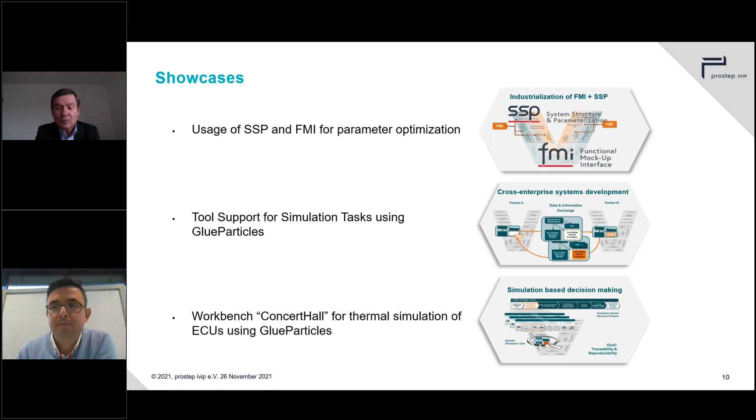Welcome to our webinar. I will introduce you how we can use SSP and FMI standards for parameter optimization as first showcase. My name is Hasan Essen from Denso Automotive, Germany. After giving a short background, I want to also briefly introduce you the SSP standard. I believe maybe for some of you it is not known. And afterwards, I will directly start with the short demonstration using FMI and SSP standards in which we developed a transmission control unit. Then I will conclude my talk.

As a background, Stefan already introduced that when we are dealing with complex system design, this requires often collaboration between engineering teams, which in return means also exchanging simulation models between these teams. These teams can come from the same company, or it can be also between companies. So in our proof of concept that we developed, we wanted to see how SSP and FMI standards can facilitate, can support this kind of collaborative development environments.

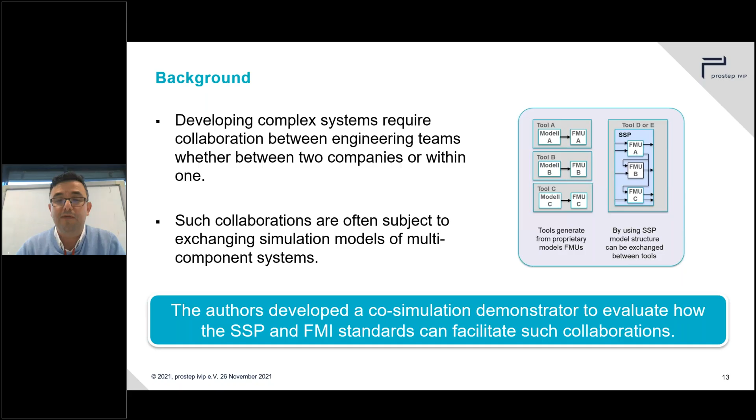Let me briefly introduce you the SSP standard. First of all, SSP stands for System Structure and Parameterization. This is developed by Modelica as a Modelica Association project. The purpose is to provide a tool-independent standard to define a complete system consisting of one or more functional mockup units, and also includes their parameterization.

As a structure, SSP is actually a simple zip file, but the zip file contains several other information. It, on one hand, contains complete system information with all related resources like FMUs and so on. But on the other hand, it consists of several sub-formats in XML. And from these formats, the system structure and description, the first one you see here, is the only mandatory one that you should have in an SSP. This basically defines a hierarchical and functional structure of this network of FMUs.

In addition to this, you can, of course, have also different XML files defining system parameters, or if FMUs have a different naming for same parameters, you may need a kind of parameter mapping, or if you want to collect control signals in a central location, you can also use the signal dictionary. But as mentioned, these last three are optional files.

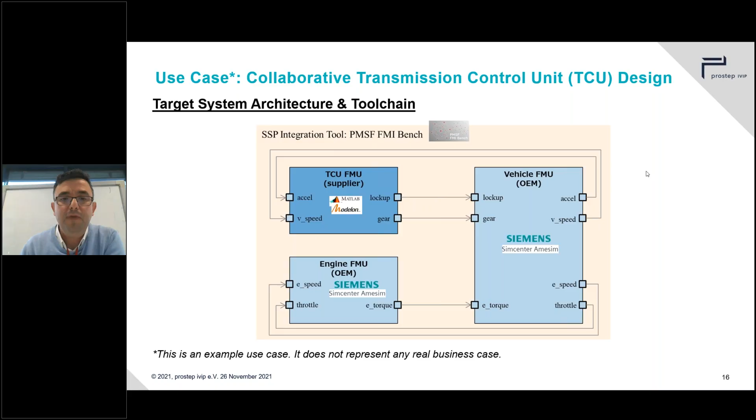So after using these authoring tools and creating the FMU models, we needed an integrator to create this SSP system, and for that we used the PMSF FMI Bench tool to create this integrated SSP system. Okay, now I will start one by one what we have been doing here. So this is, as you see, the tool interface. This is the PMSF FMI Bench, what we used for integration.

So the first thing we need to do is that using this tool, we can create an SSP project. And once an SSP project is created, we can import the already delivered FMUs from OEM first into this architecture. There's this import function, so we are here importing these ones, and through import you may also give, for example, any name you want to give or which signals you want to give. You can make this kind of selections.

After we imported the OEM FMUs, we also go to the model that we developed. Similarly, it's also imported. Yes, so basically as a first step we are done. So in this case, we basically created now the SSP project. As you see in this figure, we imported 3 FMUs. But as you see, in the status now these FMUs are not connected with each other yet. That's what we will do in the next step.

So now we want to integrate these ones. As you know, in tools like MATLAB and Simulink, you can just connect the input and output ports of the different blocks. What we do is very, very similar. Here as connectors for each FMU, different input and output ports are listed. And as shown in the first architecture picture, we have this specification, we know which input signals should go to which output, and with drag and drop these signals can be mapped with each other.

So this simple step basically allows us to connect the components together, and that's the picture we then reach. So basically now we connected and everything is now kind of ready. Actually, in this case, we can already simulate this system. We have our integrated system ready.

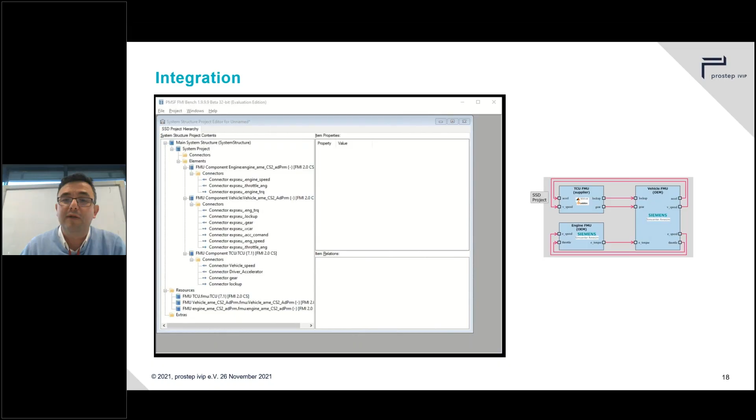However, we wouldn't be able to observe any signals, or we wouldn't be able to vary any parameters right now, because we didn't describe how we will interface those with the outside of the SSP architecture. So that's what is necessary. Once you packed and connected together, you need to define the link to the outside world from the SSP system. That's what we do: we will now expose these connectors.

And all this is actually rather straightforward. You will find a command to expose the connectors, and this will give you the opportunity to export all output signal lines. And one thing is that later on, we want to reach these exported signals, visualize them using any script, or maybe modify them. If you want to do something like that, it would be a good idea not to use directly the names as defined in the FMUs; you can of course rename them and make it simpler. You can make your life simpler for later on reaching these signals.

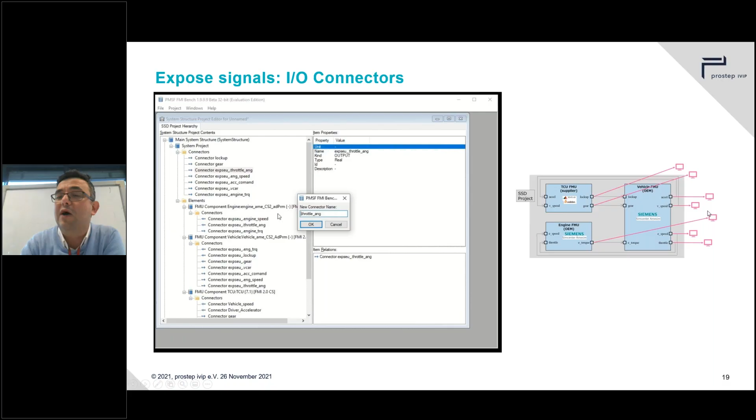Okay, when this is done, basically that's what we will reach. As you see in this picture, now it was connected, and also all of the output signals are now linked to the outside of the SSD. So we can now observe those.

Okay, so the next one: now we have the signals to observe. However, we still cannot edit the parameters. There will be, of course, many parameters in the FMUs, and you want to vary them. For example, in our case, we want to vary some parameters from engine and vehicle, and then we want to see if our TCU, or transmission control unit, is robust to these changes. This you do in a similar way.

First, from each FMU, in addition to the input-output connectors, you also make the parameters within this FMU exposed to your SSD architecture.

So this you do for all of your FMU components. Whatever parameters you have, you can expose them. And once you did this, you will do the next step, like with the signals, also from this SSD architecture to the outside world. Also, you can make them visible. You can choose which one you want to be visible, and then you need to export them, expose them.

When we do this, we will see here now in this list not only the input-output signals, but many other parameters are listed. That means that they're exposed also for the outside world. Once we completed this, there is one last step before we can simulate. We want to create a standalone simulator.

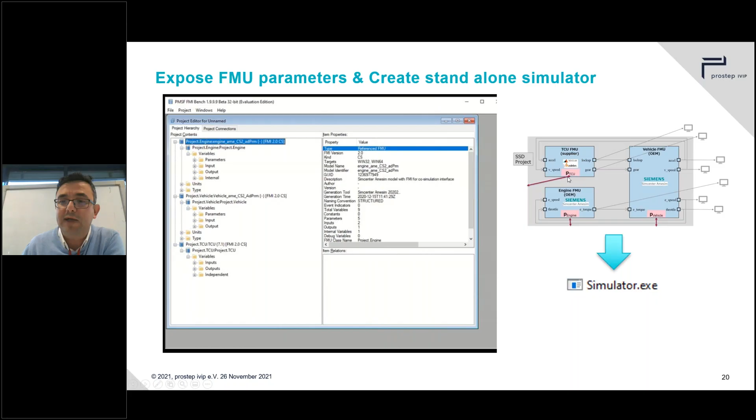That's what we now have. So not only the signals, we also have now access to the parameters from the vehicle and engine and TCU FMUs, and we exported it as a standalone file. Now this simulator file is tool independent, we can move it to any computer and we can run it basically directly. That's what we did. That's shown in this next figure.

So you can run it basically from a command line. You go to your folder where your simulator is, then, as you execute any other executable file, you run it. It offers you some parameters to add and change, so that you can run the simulation with different functionalities from the command line. -H, for example, is help. And you can also edit, for example, start time, stop time of the simulation, or some kind of high-level, system-level things directly from the command line.

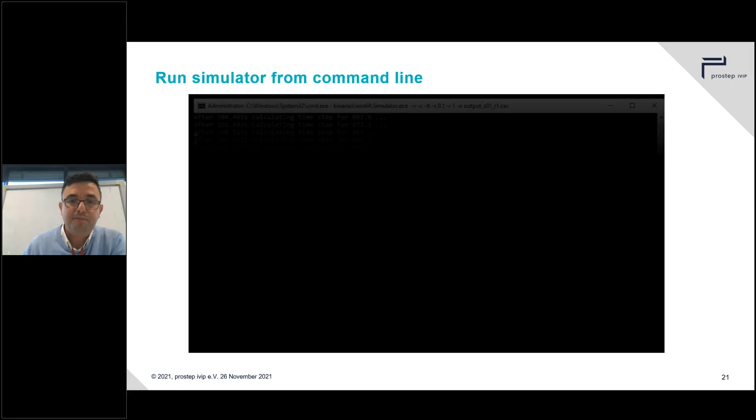Then, for example, with these kind of commands, you can give an output file destination, so a CSV file name. So when you run the simulation giving these destinations, the simulation starts, and at the end, all the output will be stored in this file where you can go and see what happens. Okay, so this was 1180 seconds, I guess, simulation. So it runs, finishes and saves the data. Of course, this is good, so you can repeat it one by one and create such files.

However, what we wanted to do is different. We wanted to run the simulation loops and make the parameter variations automatically. For that, we created a loop using a Python script, and we used Jupyter Notebook for this. So we could define, for example, the engine size between 1.5 and 2.1 liter, we can vary the engine size between these two levels, and also vehicle mass. We can run the simulation in loop without any manual interruption.

And then later on, we could see the results and check if our control unit for transmission does the things it should do. Here, one very simple example, I can show the results. If you keep the engine size constant and increase the vehicle weight, we see that since the engine size is not enough, we need more downshift in the car, which we would expect. And the other way around, if the vehicle mass is constant but the engine size is growing, we almost don't need the downshift at all. So it does what we expect. Like that, we can make the variations and check if our transmission control unit works properly.

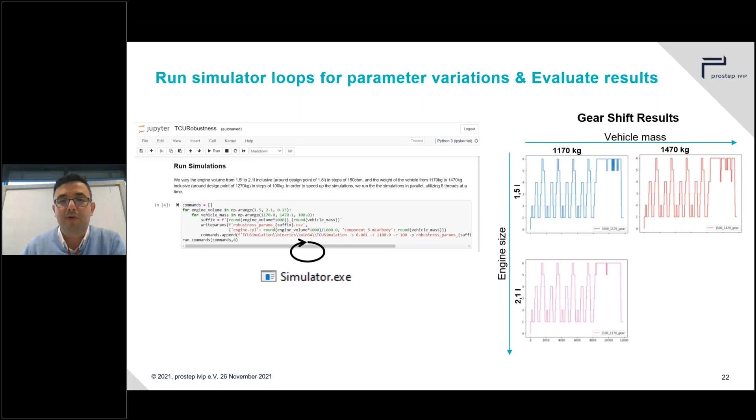Okay, so before I conclude my talk, I want to also underline one point. One of the aims of using the standards is to be tool independent. So we wanted to check if this SSP architecture can be visualized or run using another tool, to check interoperability, and for that we checked this with the Easy SSP tool from Exxcellent Solutions, and that was possible. So once you create the SSP architecture using one tool, you can use any other tools that are compatible with the SSP standard. You can import it there and work with another tool.

Okay, so then let me conclude my talk. So we created the SSP architecture with 3 FMUs with many parameters to vary. What we could see is that its parameter handling features work quite well, and it allows us the flexibility to expose these parameters. It also has the possibility to hide parameters if you don't want them to be visible, so IP-sensitive information can be hidden.

And so I believe that these standards will play a core and important role in dealing with collaborative complex system development tasks. We will keep on working on this, for example from a simulation data management point of view, or how we can create this SSP architecture automatically. Traceability is another issue, so we will continue working on this. But related to traceability, showcase 2 will show you some good results. So with that, I would like to hand it over to Pierre to introduce showcase 2.

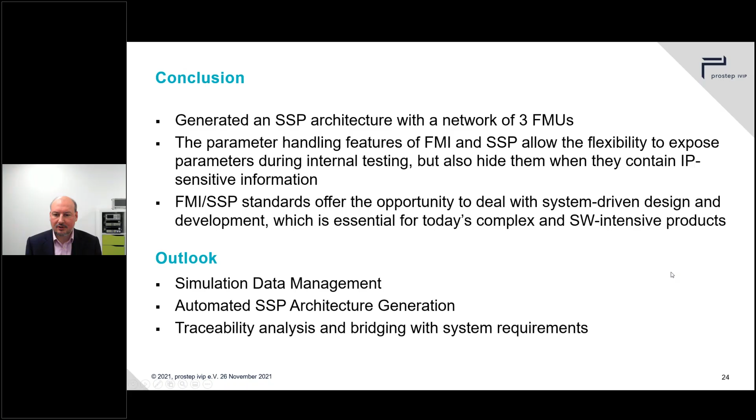Thank you very much, Hassan, and thank you for presenting these results that also employed our tool FMI Bench. I'm Pierre Mai from PMSF IT Consulting, and I have the pleasure of introducing the second showcase. As Hassan already demonstrated, SSP in combination with FMI already allows you to easily complete simulation tasks across tools, decoupling the modeling tool from the system architecture tool and from the simulation building, and allows you to achieve portability in this fashion.

The next showcase will demonstrate this in a slightly larger context, so not only at the level of being able to exchange models, but being able to do so in a credible fashion, in an ordered process, and what SSP and extensions above SSP can do to help you achieve that.

So if we look at the current status of simulation usage, I think we can all agree that we do quite a lot of simulation nowadays. We have great tools and not so great tools, but we know that great tools are available. We have great modeling languages, and standards like FMI that allow us to exchange things without sticking to one modeling language. And we have a lot of experience in the various domains with established simulation use. So in that sense, everything looks hunky-dory. We trust our simulations. We understand the benefits and drawbacks of certain modeling approaches. So that's actually quite good.

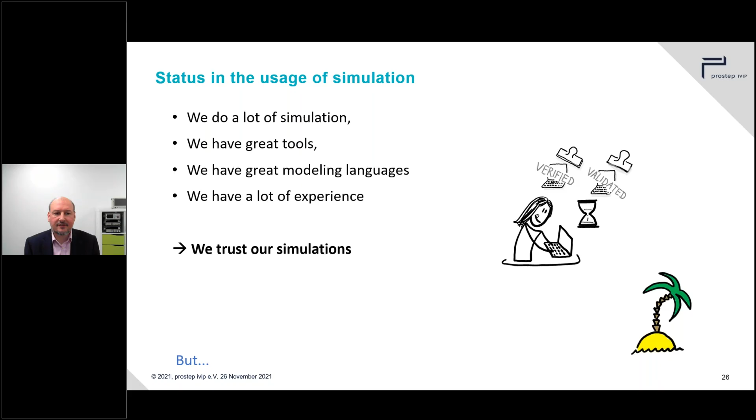However, increasingly, looking at the future, we are faced with the question of how we convince others to trust our simulations. Because decisions are increasingly based on the results of simulations, and decisions have far-reaching consequences. We are now talking about, for example, validating products mostly using simulation in some instances, or at least partially doing this in simulation and not only in real-world testing.

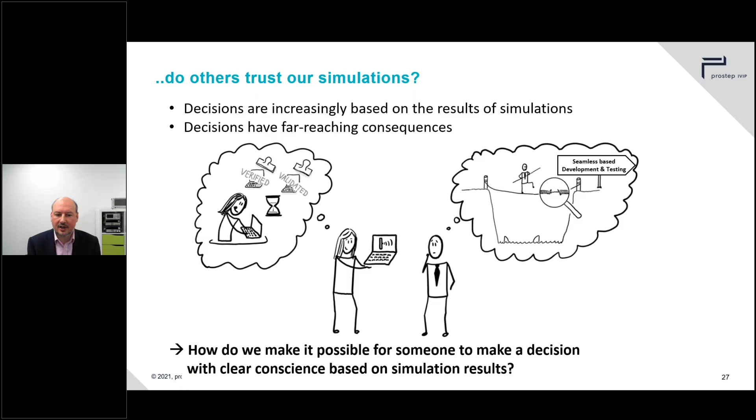And for that to work, not only do we have to be convinced that what we are simulating is proper and right, but we also need a way of demonstrating to outside instances and the public at large that what we are doing is something we can stand behind. So the question becomes, how do I transport this belief in the validity of my simulation to the outside world? The key question is, how do I convince others about the credibility of my simulation results? It's not only whether I believe in them or whether they are correct, but whether others can also believe they are correct. Are they credible in their eyes?

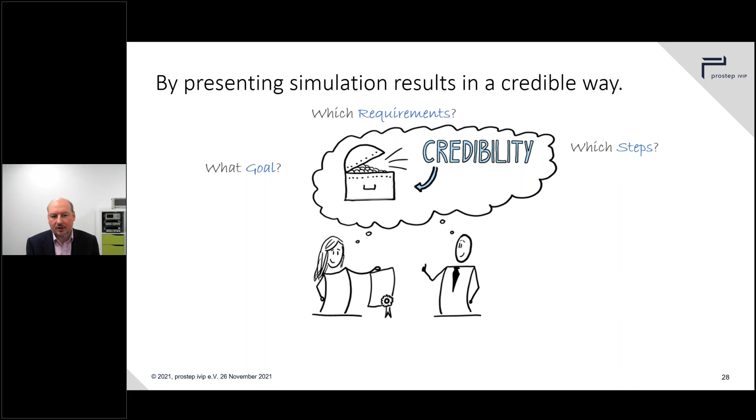In order to do this, we have to answer quite a number of questions. For example, what was the goal of the simulation? What were the requirements? Which steps were performed? What models? Why these models? How was the output processed? And so on. And these are just a couple of the questions that arise here.

So what the SmartSE project focused on was going beyond the kind of collaboration model that Hassan already demonstrated: what is really necessary to easily and reliably answer these kinds of questions in a transparent fashion? There are two parts that we see in connection with this. The first part is that we need a common understanding of the overall simulation process. So something like a credible simulation process that divides simulation tasks into individual phases and steps that can be performed with individual details, of course.

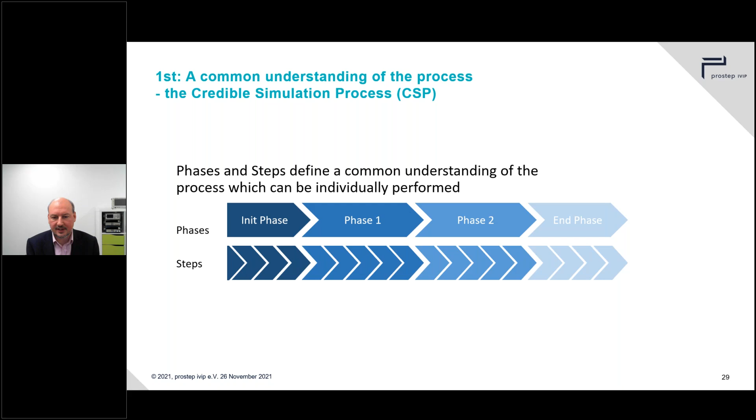I mean, every kind of simulation task will vary in its details, but there is a common framework in which we can really talk about what is happening, what needs to happen, what are the interdependencies between the different phases and so on.

And here inside the SmartSE project, an instance of this, the so-called credible simulation process, was developed and defined, and has actually in parallel also already been validated inside the SET Level project, an ongoing research project that's federally funded in Germany, where many companies are participating in order to come up with a simulation tool chain for the development of autonomous driving systems, for example. And there, this process has been adapted and has been put through its paces in order to see how and whether it fulfills the goals that are behind it.

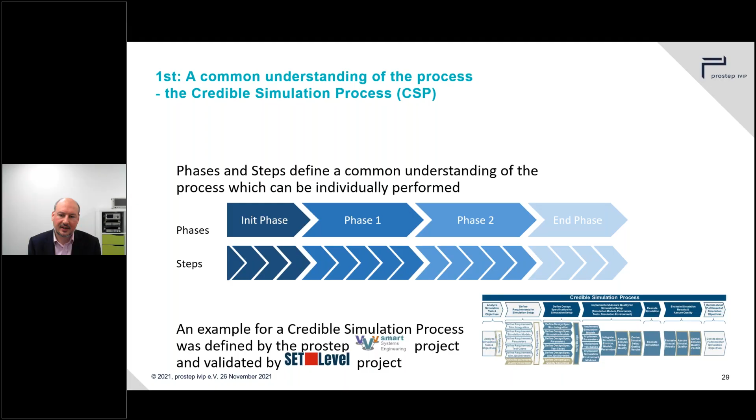And the second step to this is when we are performing such a process, lots of information is being generated along this process chain. And we really need to collect all of that information in a way that allows us to glue it together to provide a comprehensive answer, not just individual information pieces. And that's where the so-called glue particle approach has been defined to try to collect that kind of information in reusable structures and in standardized structures that allow the easy exchange and interchange of those kinds of information chains.

And the one special focus area that we are focused on is how to put something like this on top of SSP, because SSP already helps us in providing containers for exchange of data and various techniques for addressing resources that are needed.

And for traceability purposes, for the glue particle, we kind of need the same kind of capabilities of being able to take all of the disparate parts of information and piece them together, provide metadata, provide their interrelationship, and exchange them between tools that are part of the overall tool chain, because the whole simulation process will never happen just inside one tool or even just inside one partner company. It will span tools and companies, and hence we need an easy exchange of all of the partial information so that we can collect it in a good way.

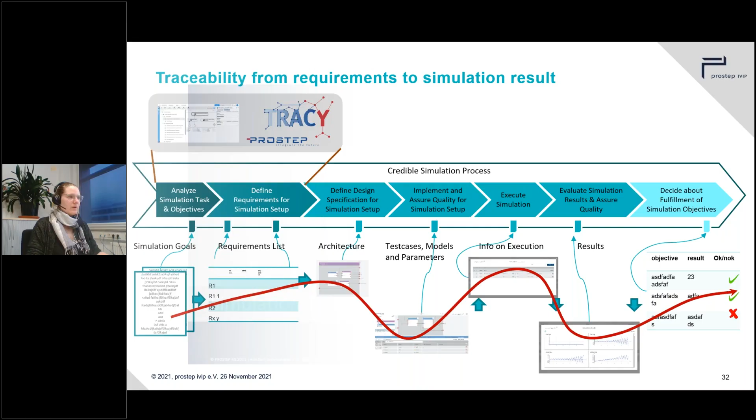And in this showcase, the Tracy user will be the overall customer in the project around the pre-selection of the DC motor, and they will therefore define the simulation task and the objectives of the whole project and the requirements, then hand over to the guys responsible for the simulation, and in the end do the evaluation of the simulation results and then decide if all the objectives have been fulfilled. And to do so, we have a look at the tool. And at first, our user needs to create the project that we want to work with.

So we create a new project via the button over there and decide to do this with the credible simulation process, which is a template in Tracy. And the resulting project then looks like shown here.

On the left-hand side, we have a tree view that shows all the phases and steps of the credible simulation process, starting with the analysis, with the sub-steps, then the requirements phase that we will go into, and in the end, the fulfillment phase. And on the right side, you have a graph view of everything shown on the left-hand side, plus extra resources that we will soon add here.

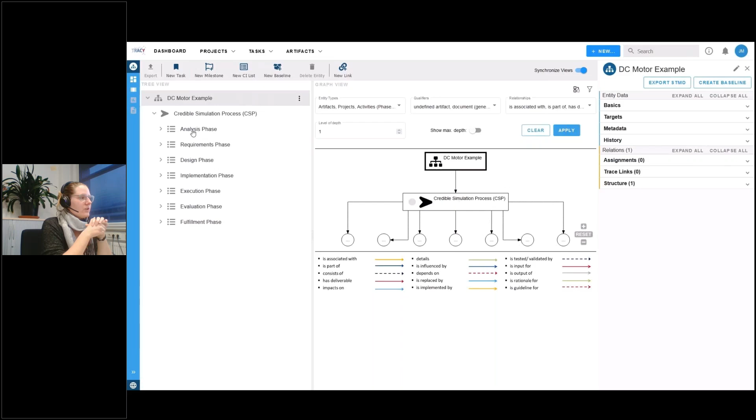And if the user clicks on anything, in the left or in the right, then on the further right, there comes the detail view, which shows details on everything, for example, that we used the credible simulation template. So to start everything, the user jumps into the analysis phase, and there to analyze simulation tasks and objectives. And here we already have an artifact added that shows the simulation tasks that Pierre introduced.

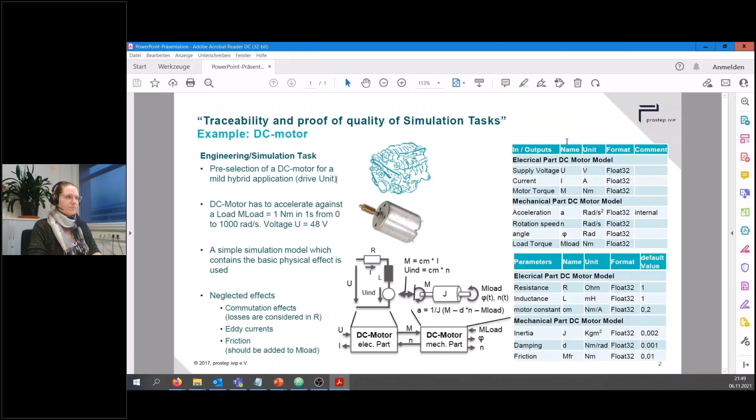And to have a detailed look, we open this artifact and go to the external resource compartment here and download the PDF that was placed there beforehand. And in the PDF, we can then see that, yep, we're here for a pre-selection of the DC motor for the mild hybrid application. And we also have some parameters that will later be used in the simulation. So this is the overview of the task we're going to see.

And based on this task, the user will then create a requirement, just an example requirement now, for the simulation model. And to do so, the user goes into the assignments of the step. So assignment is an artifact that is added to the step, and we decide that it shall be output of this. So the resulting requirement to work further with this, we create a new artifact and name it model requirement, totally generic, and choose the qualifier to be requirement, so the tool really knows this should be a requirement.

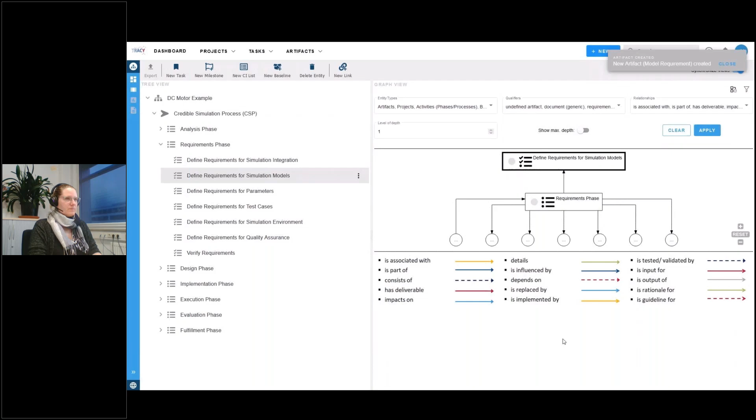And then the user adds which physical effects should be considered for the model and which effects should just be neglected and other details like that. And we create the requirement. And then we take the simulation task and the requirement and export it as an STMD file, so a glue particle. And do this via the button and receive a downloadable file, which the user can then send over to the guys responsible for the simulation. And in our case, that's Peter. So here you go, Peter.

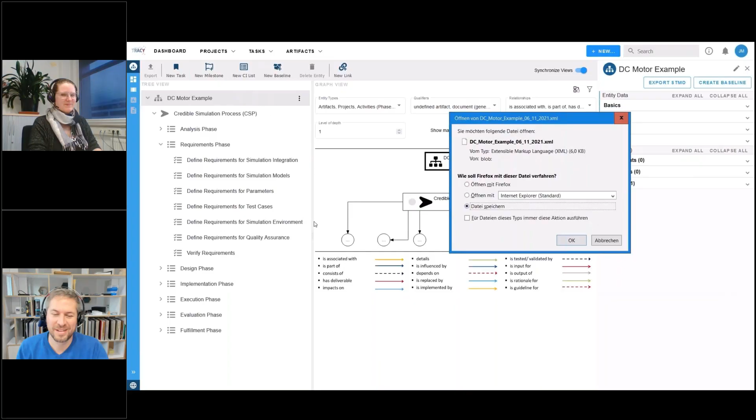Thank you, Kim. Let me just introduce myself. I'm Peter Lobner, a software architect and project lead of the EasySSP SSP model editor developed by Excellent Solutions. Yeah, now we will go on and switch to the design phase of the simulation, and I will show you how the software simulation architecture is created in EasySSP. So Kim, just click next, and then we will start.

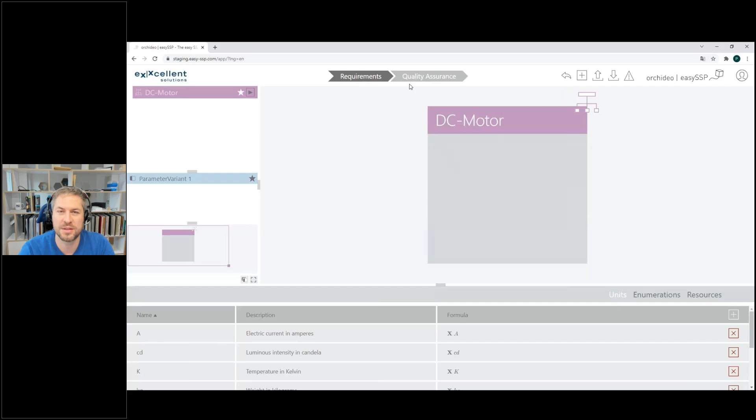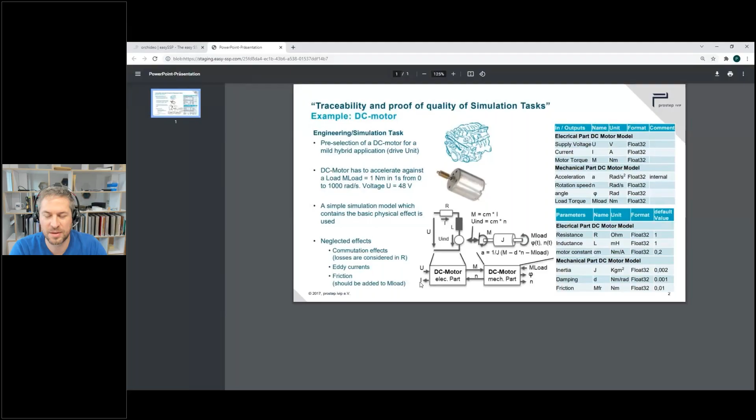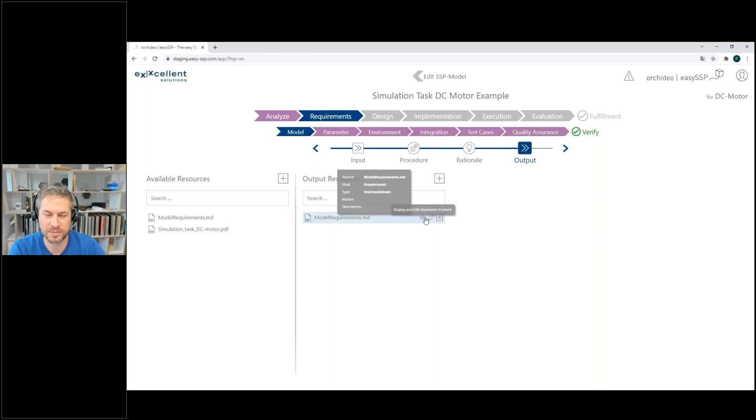And now that he or she understands the task, they are ready to start designing the simulation architecture as SSP. In the EasySSP model editor, the engineer defines the system architecture, starting with a component providing stimuli for the simulation, and then a system element for the system under test. Then he or she adds the relevant interfaces, including data types and units to those elements, and then the connections between the connectors.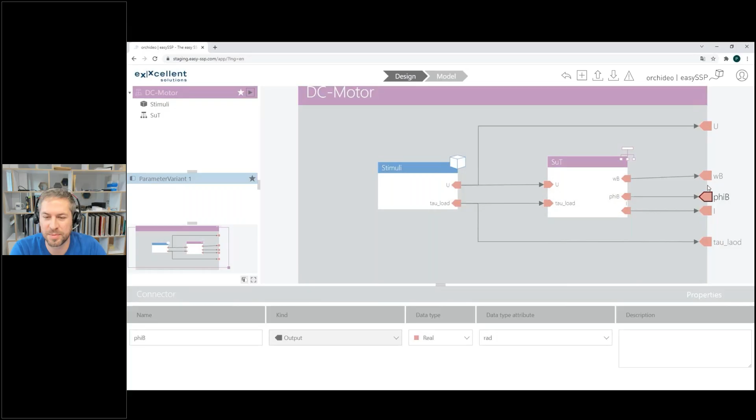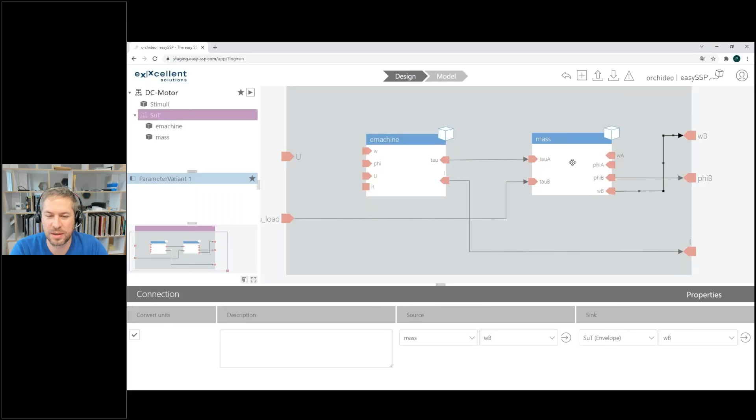To achieve a clear design, the engineer uses waypoints for the connections. All is based on the SSP standard and so fully transportable to other SSP compliant or compatible model editors. Then they go on and model the system under test with its inner elements, connectors, and connections. Let's just wait until the system architecture is complete.

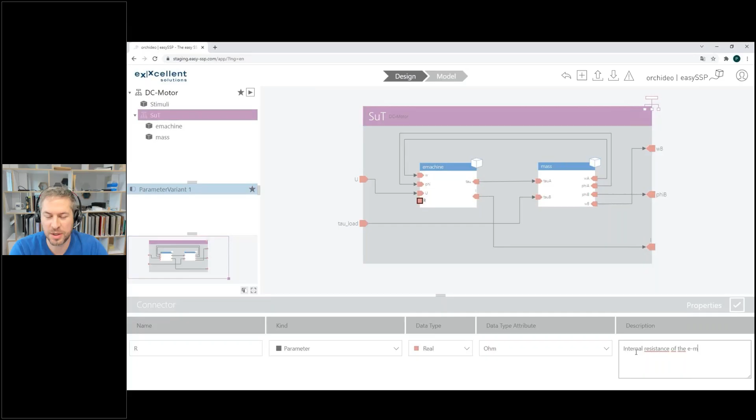Yeah, if they want to provide further design infos for the model, they can do so by adding detailed descriptions to all model elements. For example, a connector.

As there is the requirement to evaluate different internal resistances of the e-machine against each other, the engineer adds a parameter variant for all resistance levels to be tested. In this case, we want to evaluate the resistance levels 0.05 to 0.5 ohm.

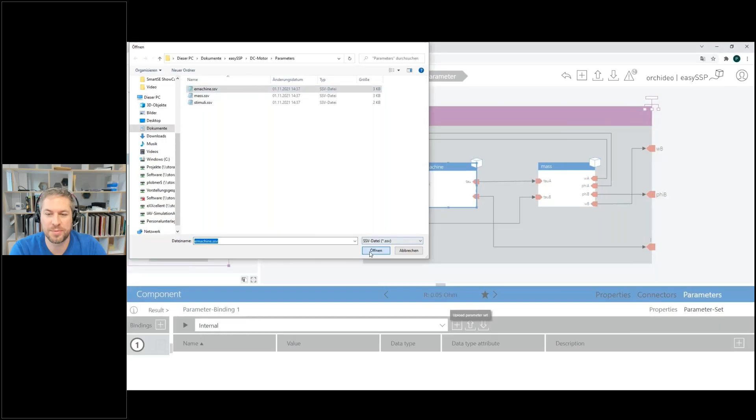To easily add parameters to the model, the engineer imports them as SSV files. That's an SSP standard compliant file format for the exchange of parameter sets. Then the engineer assigns the parameters to each simulation component and parameter variant.

The actual parameter variation is accomplished utilizing SSP's parameter binding feature that allows to override existing parameters, in this case, the internal resistance level of the e-machine. So for every parameter variant, a dedicated resistance value is specified, as you can see.

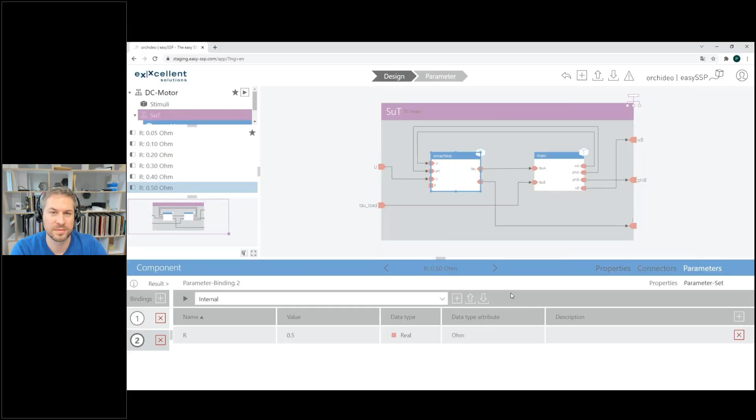So now that the system architecture design is complete, the engineer exports the SSP file that now contains all implementation relevant information, the system architecture, its parameterization, and the process information stored in the STMD file, and hands it over to the partner responsible for implementing the simulation components. In this case, that is Dag. Dag, I hand over to you.

Okay, thank you very much. So my name is Dag Brück, and I have taken the responsibility of implementing the models of our example. So next slide, please.

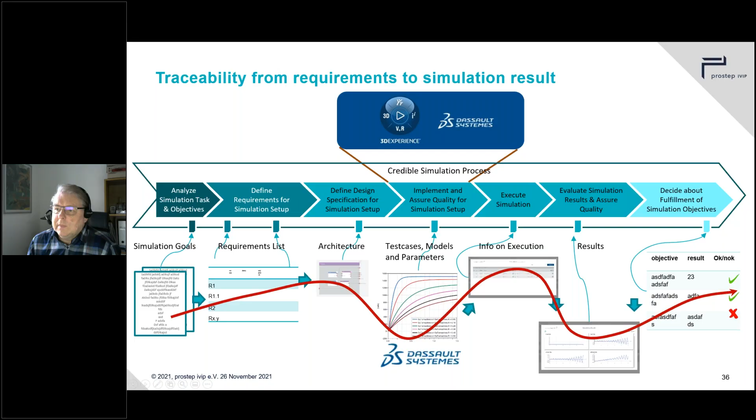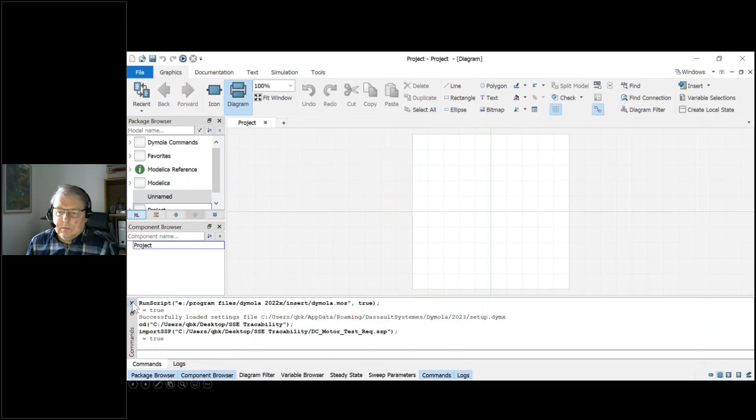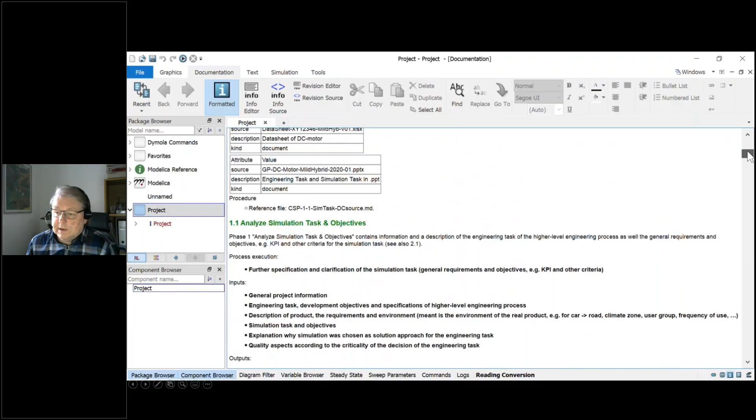So we are in the Dymola environment here, and we can open an SSP file, the SSP file containing our architecture, like this. And from that, Dymola will create a Modelica package and convert the system description into a Modelica model and import any FMUs that were present. But in this case, we have just an empty project. We also import the simulation task metadata and its associated documentation, and that will support us in the development process.

And here we see the top level model. It has a stimuli model and a system under test. And the system under test contains an e-machine and the load, the mass. And what we have here from the SSP file is the system architecture, that is the components and the interconnection structure.

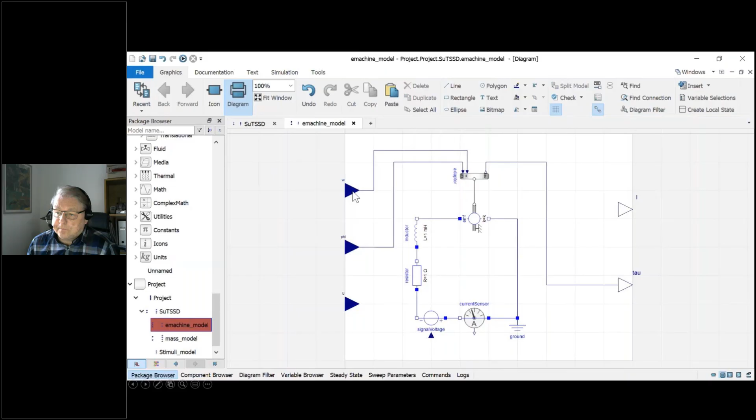And we go into the e-machine now, and then we create the behavior model in here by dragging and dropping standard components from the Modelica standard library. And then we have to connect all these components up and connect them to the predefined inputs and outputs of the SSP model. And in this process, Dymola will then propagate units and quantities from the behavior model to the connectors of the enclosing system. And then we do the same with the mass system, connect some components, and that is done then.

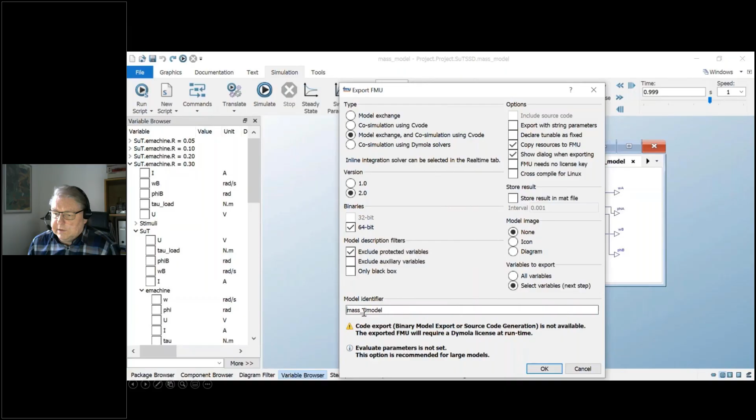And now we are ready to generate FMUs for the different components. We have several options here for generating different kinds of FMUs, co-simulation, model exchange, and include different bits and pieces. One of the important steps here is that we have to select what variables we want to expose in the resulting FMU. And in this case, we decide to expose parameters and output variables. And of course, the inputs have to be exposed as well. And now we can compile the model into executable code and build the FMU.

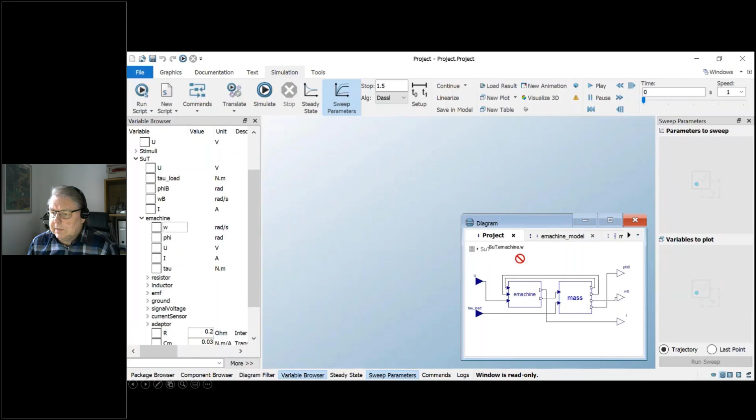And just to be on the safe side, we run a test of the entire system and sweep the parameters. So we now select the variable that we are going to study, which is our evaluation criteria, and drag it over. And then our sweep parameter, and enter the values that we're going to sweep, like this. And then we can run the simulation and look at the results and see if they make sense.

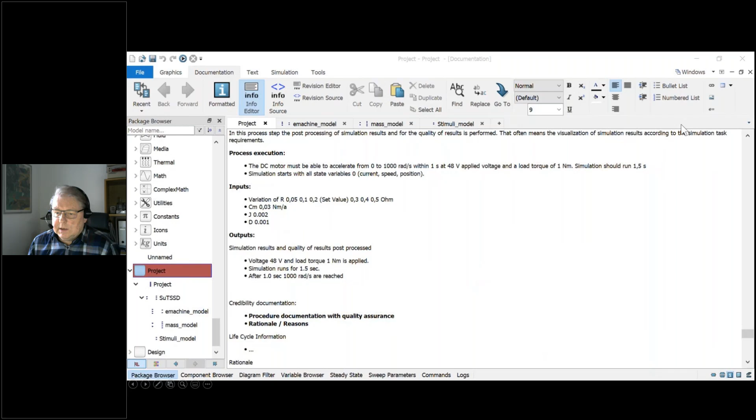And now when we have done that, we can take an extra look at the documentation and see that everything seems to be okay here. And that means that we have completed the task of creating our simulation behavior models, and now we're ready for the next step in the process. So I return to Peter.

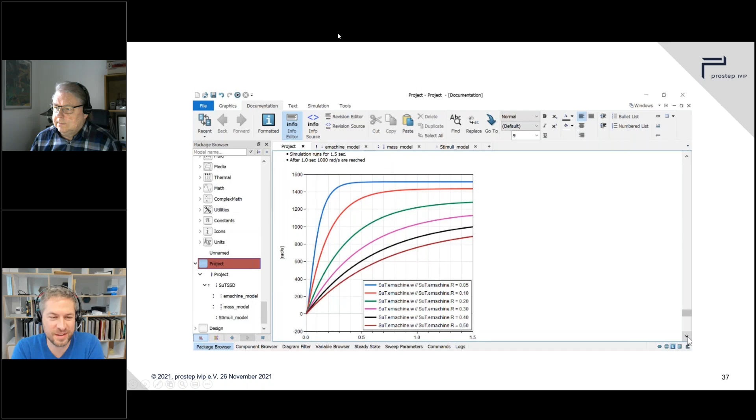Thank you, Dag. Let's go on to the next phase. Now that Dag has provided the simulation components to the simulation system integrator, we can start to actually integrate them. So Kim, next slide, please.

To do so, the engineer loads the FMUs provided by Dag into the existing simulation architecture in easySSP and compares them with the specifications. Here we have an FMU for the stimuli, for the e-machine, and for the mass. Just wait until this is ready.

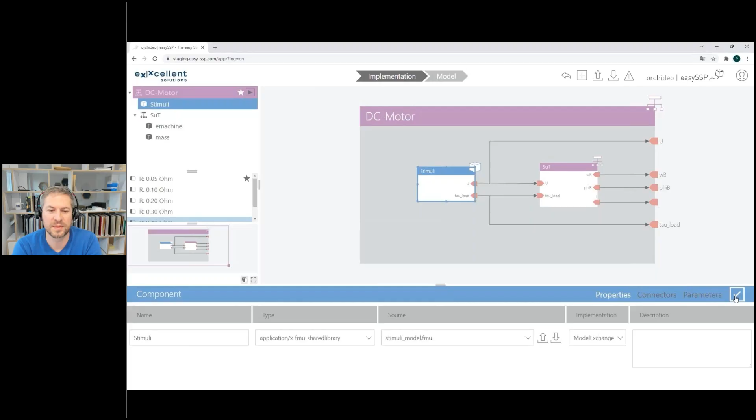So then to document the implementation of the simulation components, we add the documentation provided along with the FMI components to the model implementation step in the process here. Then we go on and insert information about the successful integration to the integration step, in this case, another Markdown file.

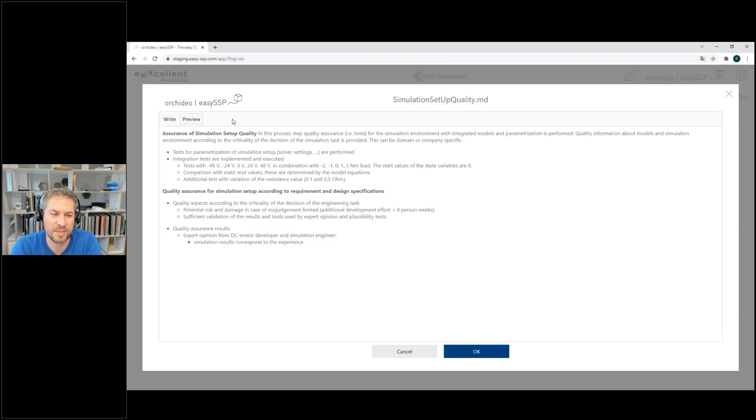And as quality is very important for the simulation task, the engineer then adds a predefined rationale describing the quality assurance actions that have been taken to achieve the demanded quality standards. Now the implementation phase is finished and the model is ready for simulation. So let's switch to the execution phase.

So next slide, please. In the simulation execution phase, the integration engineer simulates the model repeatedly and compares the different parameterizations. Due to the fact that the model is defined as SSP, one can load and simulate it in other SSP-compatible simulation environments, like, for example, Dassault Dymola, PMSF FMI Bench, AVL Model Connect, or dSPACE SYNECT Model Management, to just name a few. In this case, the simulation engineer decides to use easySSP's cloud-based simulation engine that is built on PMSF FMI Bench.

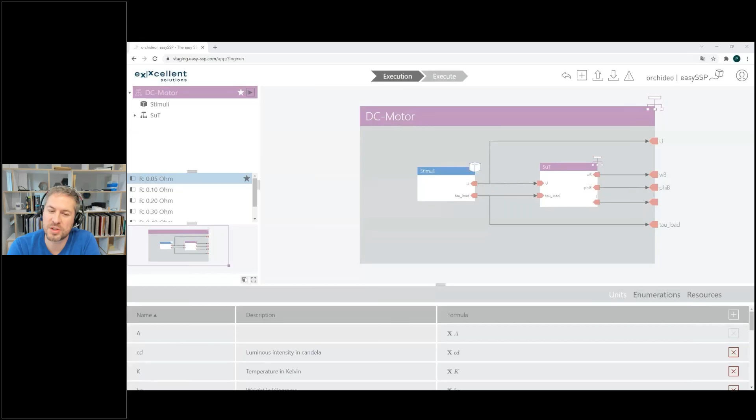Here, the simulation engineer can simulate different parameterizations in parallel in the cloud with no load on the computer. To do so, he or she opens the simulation view and creates a new simulation by clicking on the Simulate button. In the first step, you choose which parameter variants to simulate, then configure the simulation options on global or individual run level.

In the last step, one selects the desired hardware configuration from a list of available options and chooses the maximum simulation duration. And now for every parameter variant of the SSP model, a simulator is generated, deployed in the cloud, and executed. All this runs in parallel. While the simulation is running, you don't have to wait for the results, but can proceed working. In the meanwhile, the current status of the simulation is always visible in the Model Explorer.

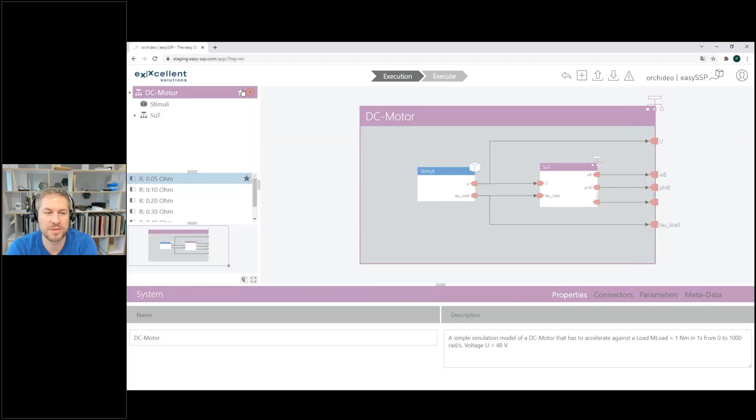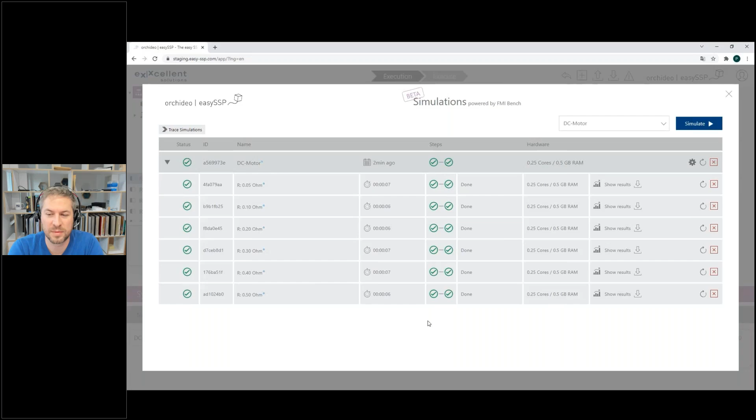And during the simulation, all status details are shown when clicking on a step. And you also can watch the current simulation results during execution if the simulation takes longer. So after simulating different settings and parameterizations, the simulation engineer shows the results in the results view. And here you can resize the charts or zoom into the data to better see the details. This helps you when you want to compare the different parameter variants with each other and choose the best results.

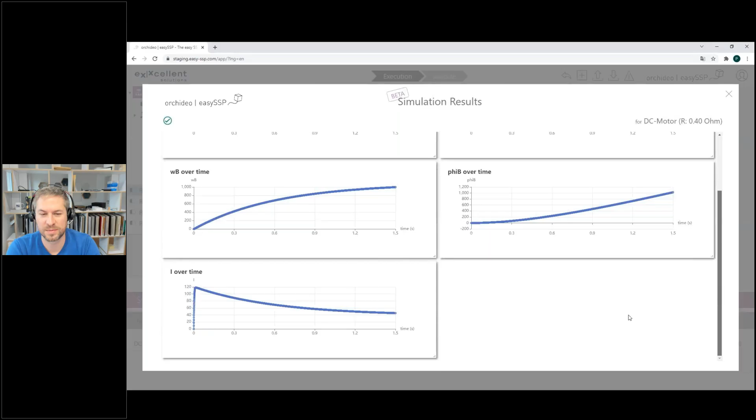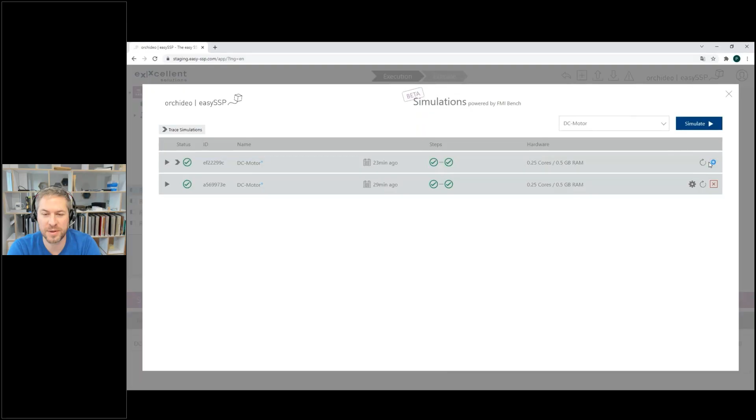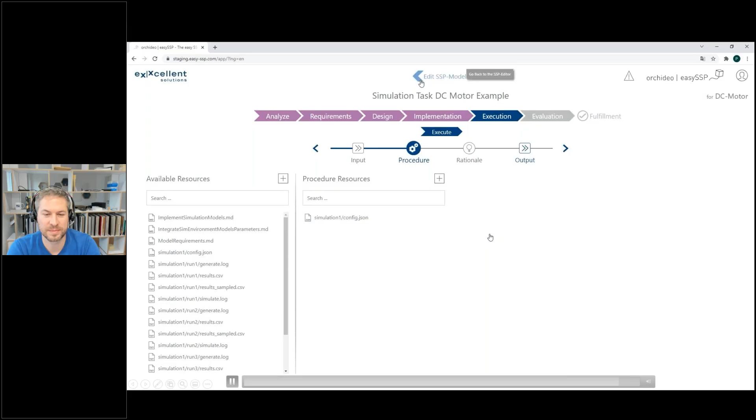If the integrator is happy with the results, he or she can choose one or more simulation runs and store them with just a few clicks in the glue particle. And since all relevant information like model, config, and results are stored inside the SSP container and the STMD file, the simulation engineer can reload the SSP model later to show the results and simulate the runs with the original settings. And after completing the simulation phase, the engineer exports the model as SSP and provides it to the person responsible for the evaluation. And that's, in this case, Kim, back to you.

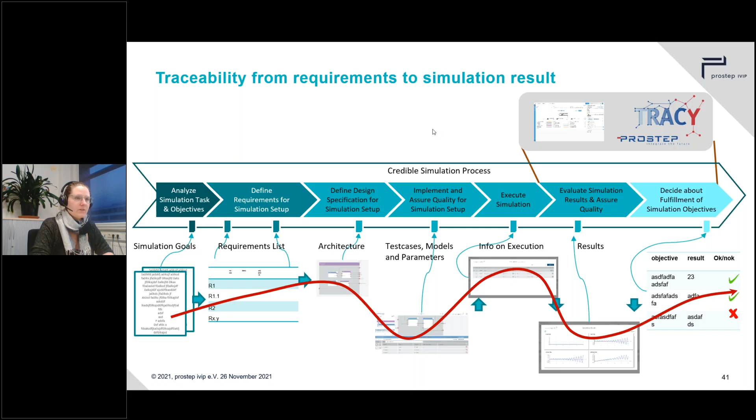Hello again. We're now in the final two phases of the credible simulation process, which is the evaluation of the simulation results and then decision about the fulfillment of the simulation objectives. And here the Tracy user will spot check some of the results that were provided by the simulation integrator and conclude the whole process. So let's do it.

At first, the user needs to load the SSP provided by the system integrator into Tracy. And they can do this via the project list in Tracy, via this button, import an STMD file or an SSP container. And the imported project then looks like this. We see again the process information that was in the glue particle, and we also have all the resources that were used by the system integrator, plus the resources that the Tracy user, him or herself, created here. So let's now do an evaluation.

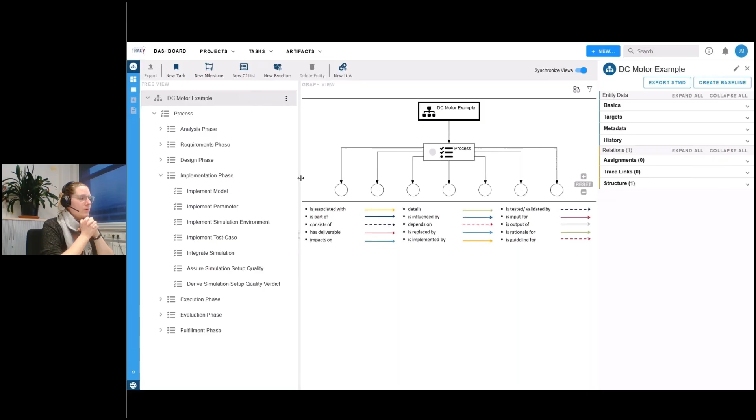For this, the user now especially wants to check in on the quality assurance. So they move to the quality assurance step in the implementation phase, and there check the document on the setup quality that was provided by the system integrator. The user goes to the resource information and downloads the provided markdown file to check if everything was in order. And let's say to the user, this all looks sensible. So everything was done as it should have been done. Every quality measure was taken that needed to be taken.

So this is all fine, and the user can move on to the execution phase and check into the results. So into the assignments, and here into one of the diagrams of the simulation runs, which can also be downloaded from the resource information and opened, and the user can have a look at the diagrams that we just saw. They all seem to be good for the user, so the execution was fine as well.

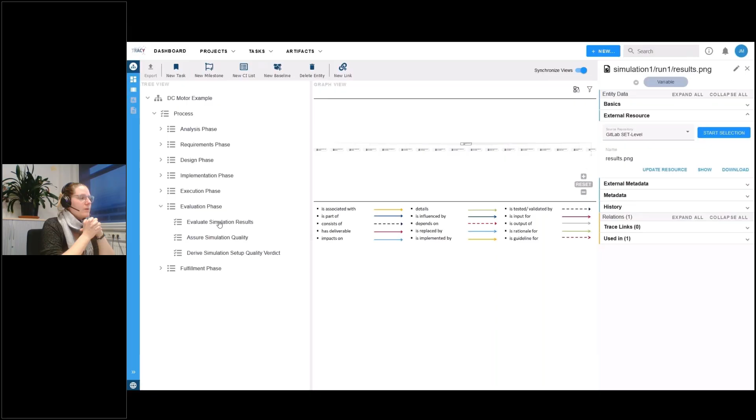And then the user can note down the evaluation results, so their thoughts on if everything was okay or not. They can do so by adding another artifact, as we already did in the requirements phase. Again, an output and a new creation and another generic title like evaluation results. But another qualifier, this time the qualifier is a rationale, because this is really thoughts of the user on what happened. And the text is that the simulation was executed correctly and that all the results are credible to the user. And with that, the evaluation phase is then done in this example case.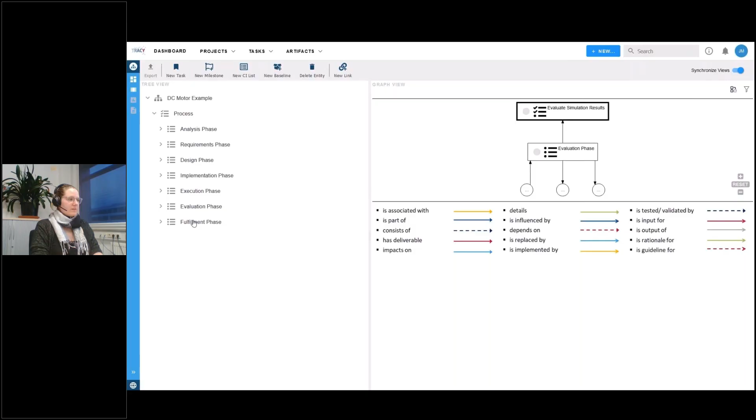So the last thing that's needed is the fulfillment phase. And for that, the user can use the overview that Tracy provides over all the process steps that have been taken and all the resources that were either created by the user here or by users in other tools. And with this, the decision can be made that in our case, we think that the simulation was done fine and that the goals were successfully reached.

And this can be noted down in another artifact in the same way as was done in the requirements phase and in the evaluation phase. But for now, we'll skip this because it's just the same steps again. Everything was done fine.

So the next thing is, what happens if not everything was totally fine? What if the user encounters a problem during the project? It might, for example, be that he's on a coffee break and another simulation user and someone from another project comes up and says, we've always had problems with one specific model in our project. I cannot remember the name correctly, but you might better check if you have any connections to our project and see if your model has the same problems that we have, because it might be the same model.

To do so, the user can then use the impact analysis that Tracy provides. And the impact analysis is basically a graphical representation of all connections and relations between elements in Tracy, elements that were created directly in Tracy and elements that were imported via SSP and STMD. And in this information, the user then can filter for specific things. For example, was our model reused in other projects, and where exactly was it used?

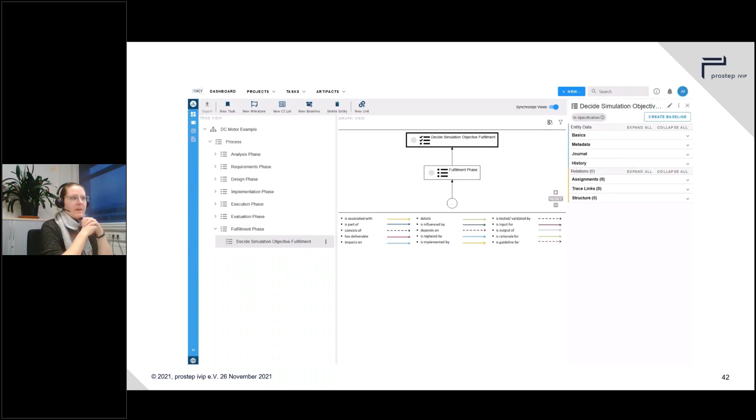So we'll do an impact analysis with one of the models that we used in our experiment here. So the user goes to the implementation phase and there to implement models, where the models were put down as the artifacts. And the user can go to one of the FMUs and open it in Start Impact Analysis. What you see now is the impact analysis with different filters. For example, for entity types, so we could choose artifacts or projects. We could choose specific artifacts like the requirement or rationale we had. And you could choose different relationships like input, output, or a requirement.

And in our case, we want to know if there is a project using our model. So we select projects and we go to the maximum depth to really see everything and apply the filters. When we have applied the filters, we see that the model, in fact, is used in other projects, in another motor example, in DC motor example, which is us, and in the project XYZ motor, but not in the project that the other user mentioned, which would have been project ABC. So at least for this model, we're safe. We don't have a connection to the project that the other one warned us about. And we can still say we reached our simulation results and we did not have any problems.

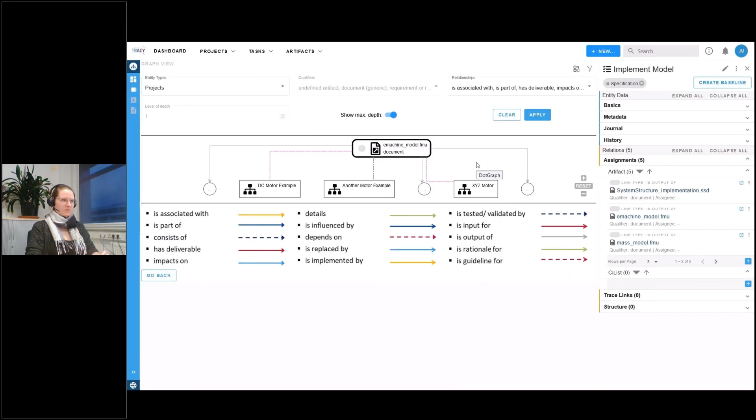And with that, I'll hand over to Pierre for the conclusion of our showcase. So Pierre, here you go. Thank you, Kim.

So to conclude, what did we see? The whole purpose of this showcase was to show complete traceability from requirements to simulation results, but not just in the usual fashion, but rather in a way that,

I think I'm stuck actually. Kim, can you switch one step further?

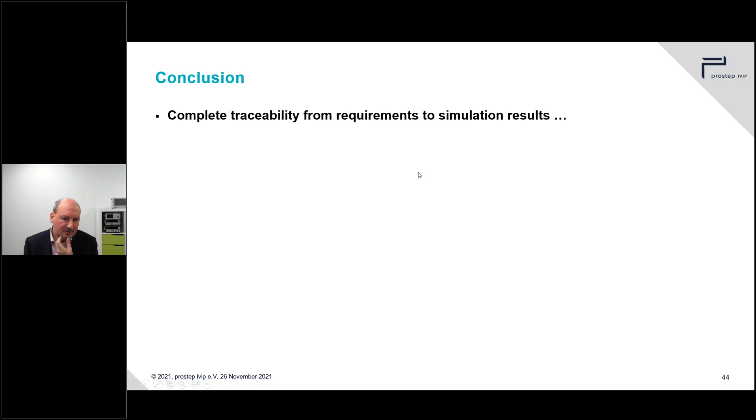Thank you. So this was based on a standardized approach. So all of the artifacts that were exchanged in terms of models and system structure were SSP based, and all of the additional information that needed to be transferred, additional documents, inputs, procedures, rationale, output documents, were transported using the SSP traceability extensions. And to emphasize, no proprietary bridges were needed.

So all of these 4 tools were able to cooperate without each tool knowing about the other tools. There's no Dymola-EasySSP bridge or Tracy-FMI Bench bridge or whatever. All of them just do standards-compliant data exchange using standardized formats.

And the other benefit that this also entails is that we've seen that, of course, certain information must come from the simulation engineer by manually providing, for example, rationale information. Why did he do certain steps or in what way? But other information can automatically be filled in because it is automatically generated as artifacts, as inputs, outputs during the simulation, and hence can already be automatically recorded inside the traceability. So that's the one thing.

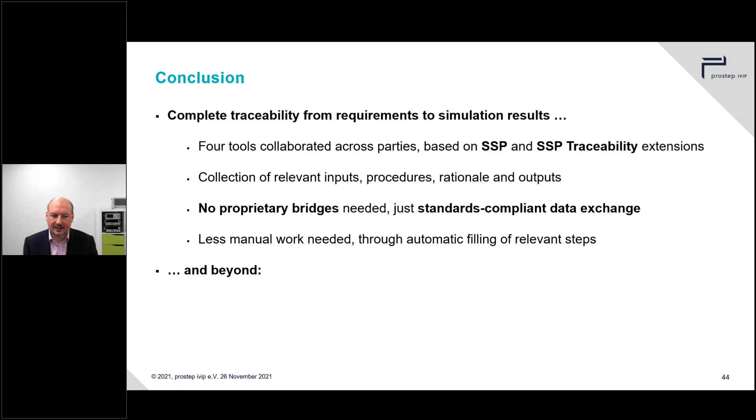But what Kim already showed in the last step is that if you have this kind of information base, especially not only across one project, but across multiple projects, multiple iterations of projects and so on, using this standardized data exchange, you accrue quite a number of interesting pieces of information that allow you to then do analysis based on that, to do error impact analysis, or error cause analysis, so where did an error occur, where did it arise from, what do I need to fix in terms of my artifacts or in terms of my processes to prevent it from reoccurring.

How can I reuse certain models, for example? How do I find those models? How do I find the relevant metadata for the models? Were they validated? If yes, for which purposes, and so on. So this gives you another level of increasingly improving your processes.

And of course, if we are able to create this kind of feedback loop, reuse, traceability and QA analysis really leads to an increase in reliable simulations. So that's the same thing that we've seen in manufacturing, is that the moment you are able to measure and to close the loop, you can increasingly increase your quality and your processes and try to achieve something like a zero defect strategy. And that's what we really want to see happening in this space.

And that's also why I'm actually very happy that the Smart Systems Engineering project, with its approach of trying to foster standards-based interchange and then providing and developing the processes that are needed to really make industrial use of those standards and further those standards, really allows us to do something like this and create a baseline. And again, it's not about the 4 tools that you were seeing, but of course, we as manufacturers of those tools are very happy that it's those 4 tools, but really based on the standards, this allows any kind of tool that wants to support those standards to be integrated into this kind of landscape.

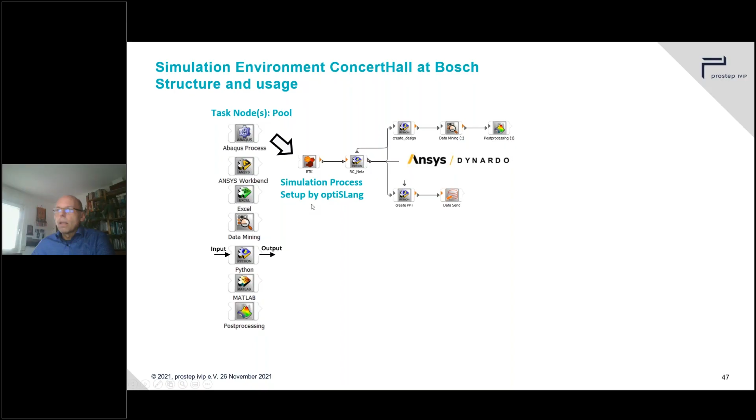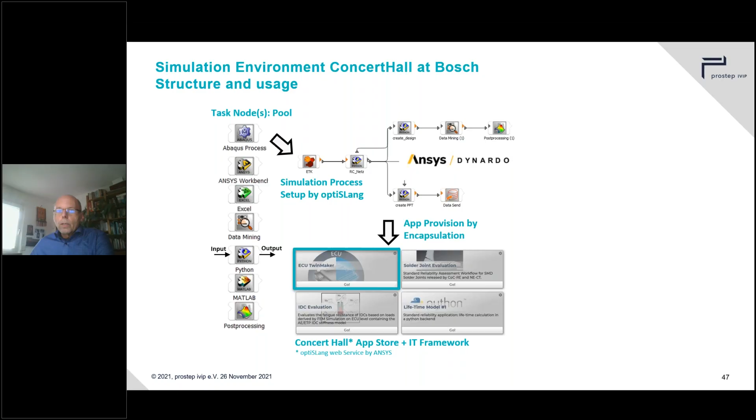The Concert Hall is used for various simulation tasks such as thermal design of control units. Commercial as well as self-developed tools are used. You see here a selection of these tools. Special workflows have been developed and various applications have been built up of these workflows. And we use here from ANSYS the optiSLang tool. And these workflows we make available to the user via apps you see here.

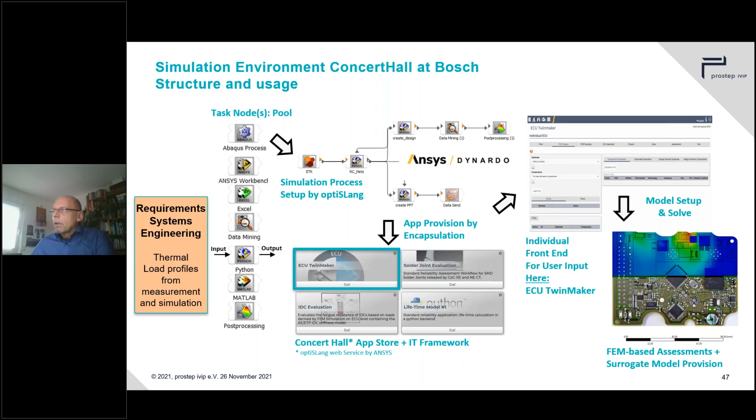The user then selects the specific information like project, electronic devices, layouts. We can then, for example, simulate the impact of different brake profiles of an ESP system on the thermal behavior of the ECU and get the results. So those are typical simulation use cases we use at Bosch, not only in the beginning of development, but also for verification and validation of our products. So these workflows are quite common and broadly used in our company.

So the result and the generated report, as well as the information required for traceability and replay, are then available here.

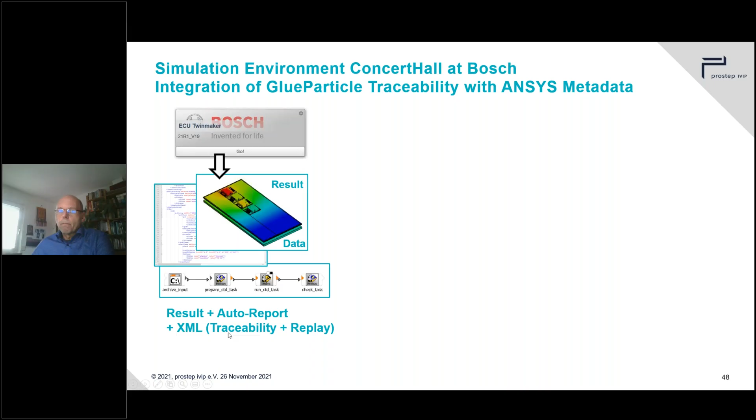As an extension of the traceability functionality, we want to make the information contained in the simulation tools available as well. So most simulation tools have all information which we need for traceability. So what, for example, are the tool version? What are the solver settings? These are inside the tools, and most of the tools are able to export that at the moment in proprietary formats, and the ordering is also proprietary.

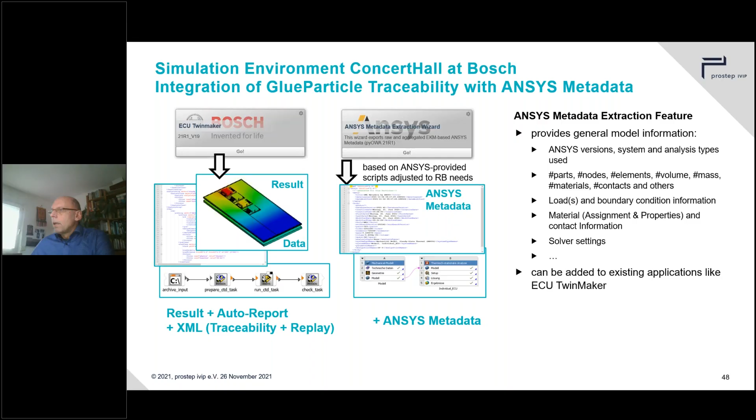So what we have done now in a first step, we use here the ANSYS metadata extraction feature for a first prototype to extract this information. And what does the integration of the glue particle approach look like? We are scripting the automated export of the relevant information, both from the ECU TwinMaker and from the automated ANSYS metadata extraction is carried out.

After that comes the splitting of the information from here into the special chapters of the glue particle. And then comes the storing of the glue particle in the SPDM. That happens in the background without any additional effort for the user. This is a very crucial point for the acceptance, because at the moment, traceability often means that the user has more to do and the acceptance is therefore low.

That is a point Pierre already mentioned. So we really have to take into account that most of the information we have to generate automatically and fill up the necessary information sheets for traceability automatically. So as little effort for the user as possible.

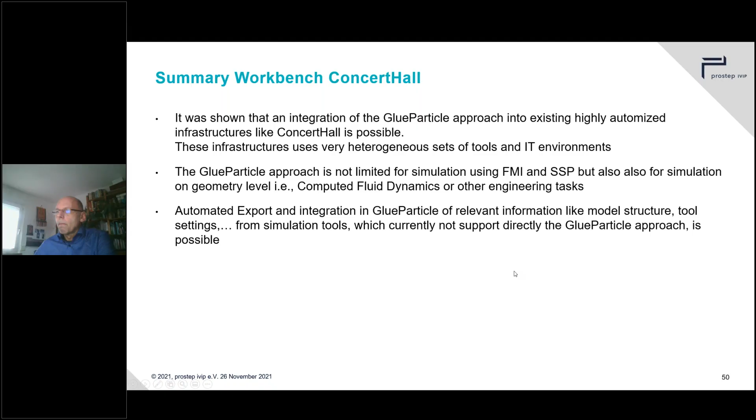Now I want to summarize the showcases, and I want to give an outlook of the SmartSE project for the next years. So what have we addressed? The usage of standards like FMI and SSP, how traceability, reuse, automatization, search, analyze functionalities can look like, and how that can work in cooperation between several partners with different IT and tool environments.

Topics which are also important in simulation-based development and validation: we need processes, recommendations for cooperation of several partners, and how can we deal with abstraction and modeling, and what do we need for the reliability of simulation results, and what should quality standards and recommendations for simulation look like. These topics we address in phase 5 of the prostep SmartSE project.